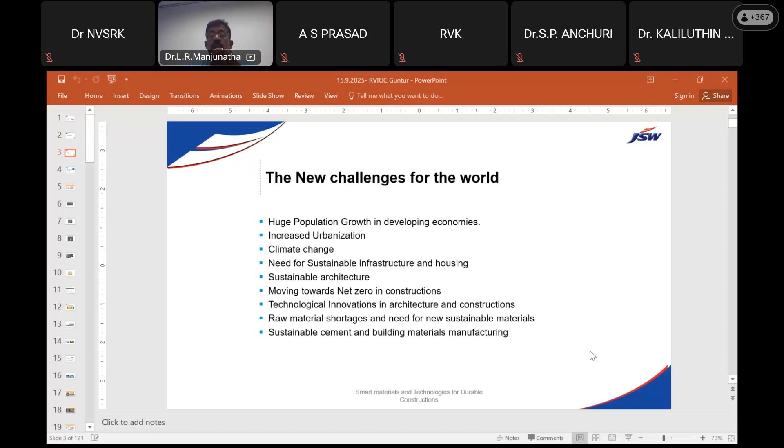Net zero means whatever carbon emissions are produced are offset equivalently, saving carbon dioxide in construction. Technological innovation in architecture and construction, raw material shortages, and the need for new sustainable materials, sustainable cement and building materials manufacturing - these are the new trends happening in the construction industry.

And we are part of that development. As I told you, my dear friends, the background for construction is cement. We are going to use cement, and concrete is the second most consumed material on this planet after water. We continuously consume concrete because it is the most economical material, abundantly available, and compared to other products like steel, aluminium or timber, it is more sustainable.

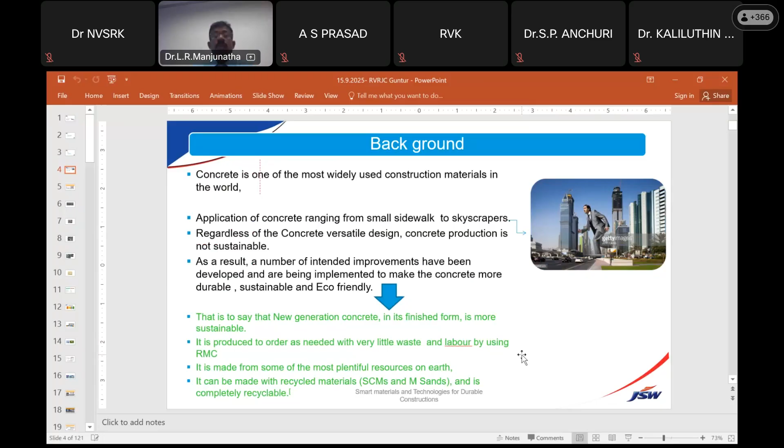But we need to look into the way we use cement for construction and developing skyscrapers, because every ton of cement produced emits carbon dioxide. This is because limestone, the material used for making cement, is calcium carbonate, which gets converted into calcium oxide.

As I told you, my dear friends, as the world moves towards huge urban population growth, 60% and above of the world population will be living in urban environments by 2050. The population growth by 2050 will be 9.2 billion people from the current 6.8 to 6.9 billion, so population is continuously increasing.

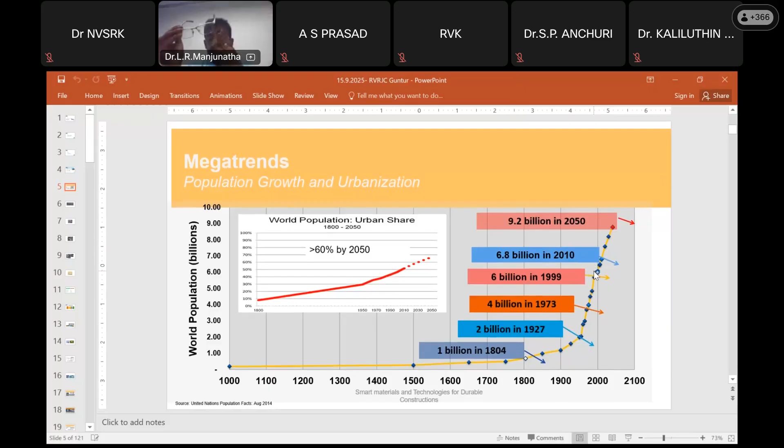That too in developing countries like India, China, Bangladesh, Malaysia, and Indonesia - these are huge population growth centers. So we need to develop relevant infrastructure.

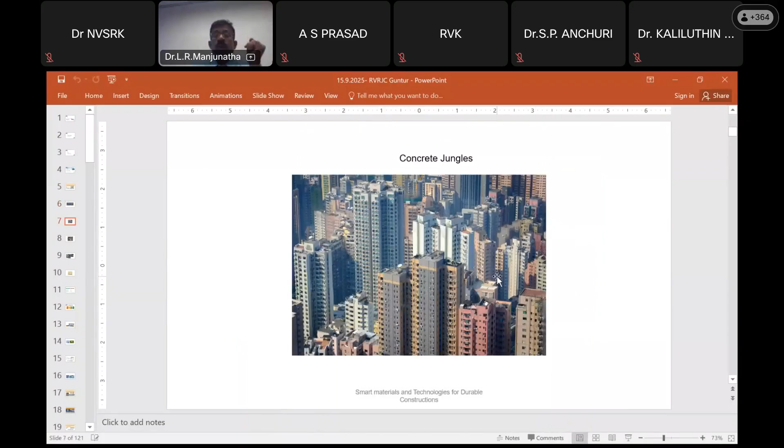This is going to be the future, because we need urban slum development - redevelopments are happening in the slums. In a city like Mumbai, redevelopment is going to happen, and this entire stretch will not be there in the next 5 years. You can see only tall buildings like this after 5 to 10 years.

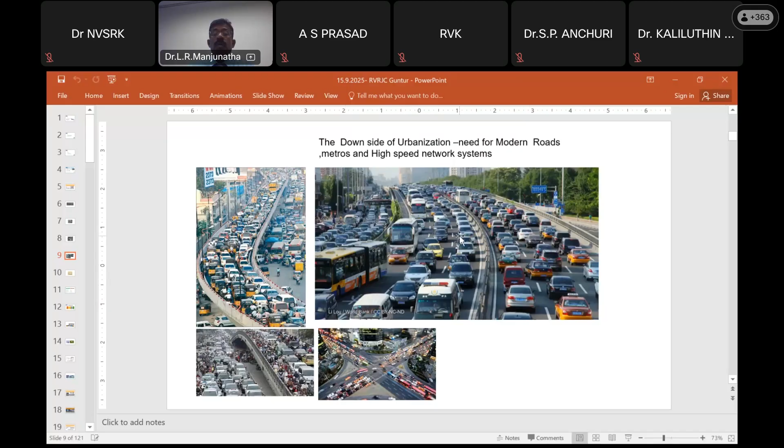On weekends, you can see all the highways full of people and vehicles, because owning a car is not a big thing nowadays - most middle class people own their own cars. So they come out with their own vehicles, clogging the road infrastructure. These are the adverse effects.

The adverse effects of urbanization include rapid development of cities, lack of sanitation, poverty, and unemployment. Cities not only attract educated people, they also attract the workforce providing facilities to middle class or highly skilled people - you get maids, carpenters, taxi drivers, all kinds of people migrating to urban centers in search of employment, livelihood, and better facilities.

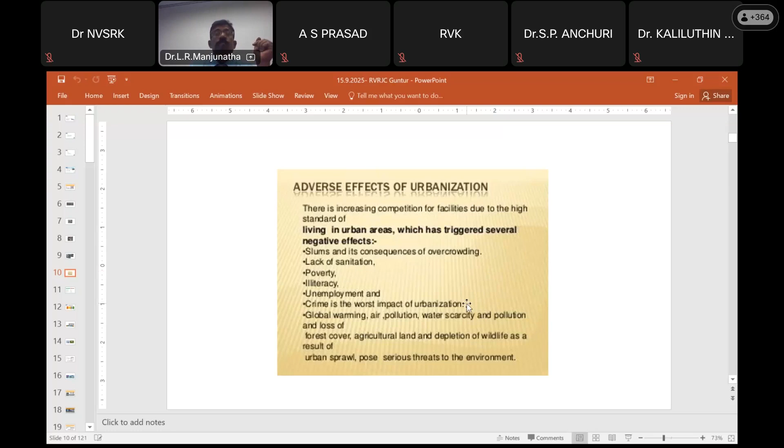This is leading to global warming and urban heat island effects. So, urbanization has pros and cons - people may get better public transport, but there is high level pollution, noise pollution, light pollution, and higher chances of homelessness because people start living in slums they cannot afford.

In a city like Mumbai, you want to have a small 1BHK, you have to spend not less than 30 to 40,000 rupees per month. If you're not earning so much, say only 25,000, you tend to live in shared apartments or maybe slums. So that's how the cities are getting shaped. Concrete jungles are there, and we need to really work to support the population.

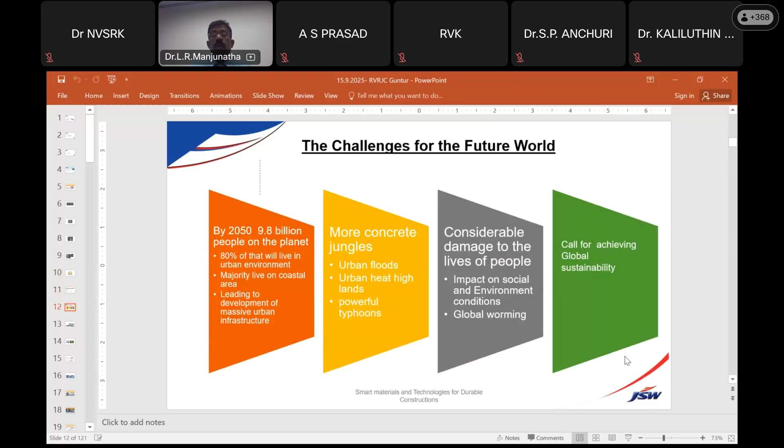So the future depends on how we can develop smart materials, smart energy, and smart construction. Smart construction comes with challenges.

We have to construct sustainably, because every year the world construction industry and related industries emit 50 billion tons of carbon dioxide. About 30% of these emissions come from the construction industry alone. We have buildings, iron, steel, cement, and other industries using materials which emit a lot of carbon dioxide.

I want to dwell more on the cement industry and how emissions come from it, because we use limestone to make cement along with clay or iron oxide. We mix these fine materials and heat them up to 1500 degrees centigrade. We heat it in pre-heaters, pre-calcination, where we remove carbon dioxide from the calcium carbonate, that is limestone, and take that raw meal, heating it up to 1500 degrees, sintering it in the rotary kiln using thermal sources like coal or alternative fuels.

At the end of the day, we emit close to 925 kg of carbon dioxide to make 1 ton of clinker. We need to really work on that, because as we consume more and more cement, India is already consuming 450 million tons of cement last year, and the installed capacity is close to 700 million tons. We are going towards 1,000 million tons installed capacity and consumption of 700 million tons of cement by 2030, because we are building more and more infrastructure projects.

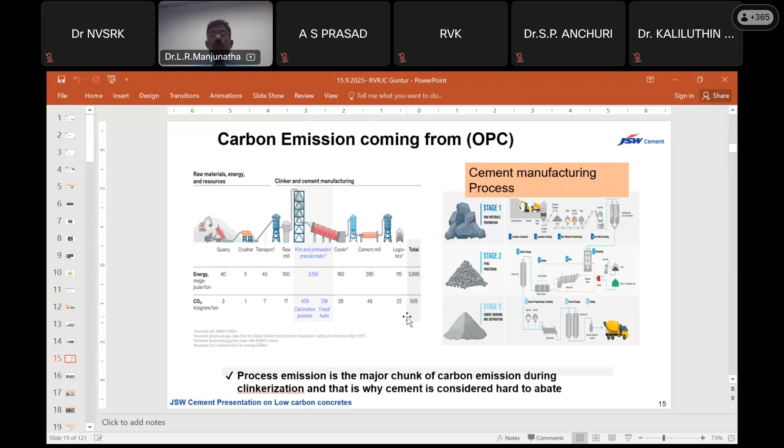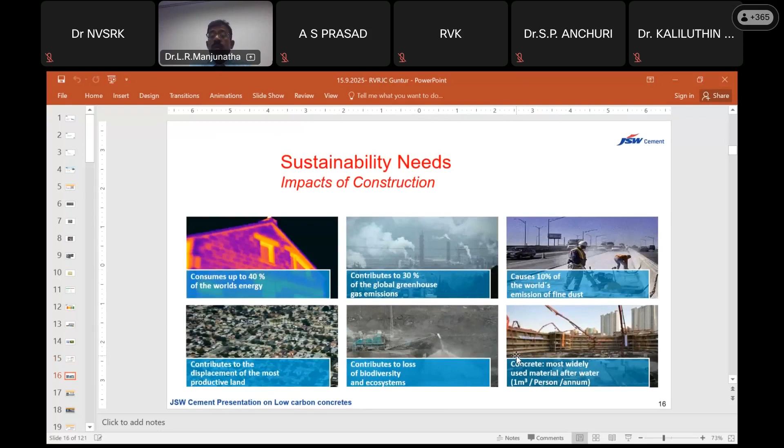So significantly, we need to work on the impacts on construction because of sustainability challenges: dust at 10%, greenhouse gas emissions at 30%, and energy consumption up to 40%. And we know we have to live with concrete, because it is the second most consumed material on this planet. So these are the challenges.

We encounter huge challenges, increased carbon dioxide emissions because of higher consumption as we go forward. Then landfill space and additional cement plants are going to come. The usage of water is also tremendous, along with increase in land use. These are the challenges we face continuously when we go towards sustainability goals.

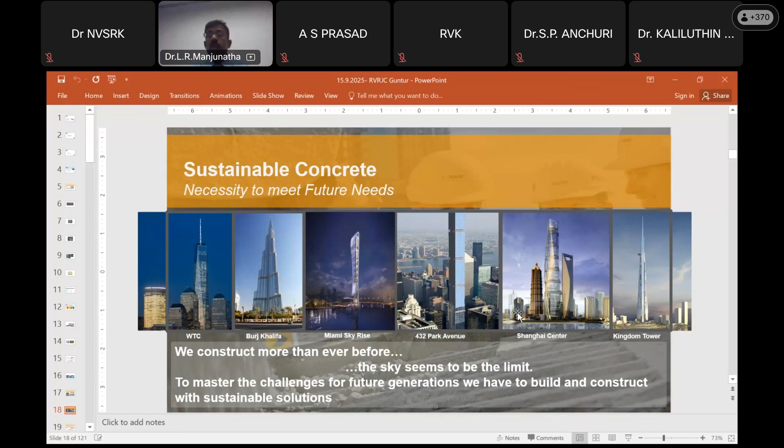As we know, challenges are more, but we cannot stop the construction. High-rise buildings are going to come. This is the skyline of many developed geographies - the Burj Khalifa, World Trade Center, Shanghai Center, Kingdom Tower, and so on. Similarly in cities like Bangalore, Hyderabad, or Mumbai, we are already seeing towers up to 50 floors, and Mumbai towers up to 100 floors.

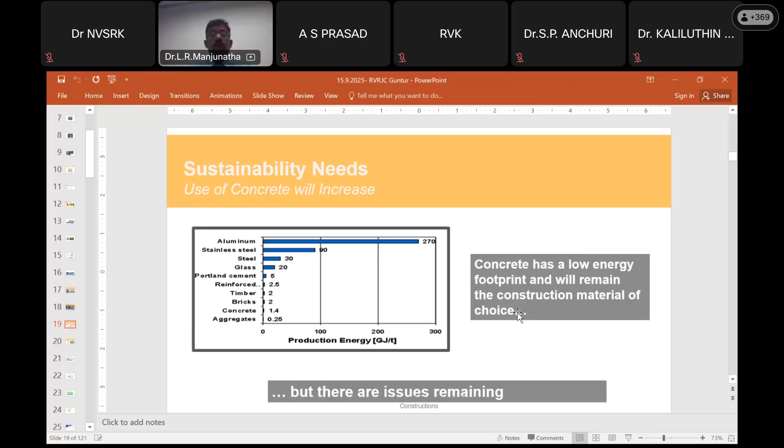We are seeing the skyline of Mumbai, and it's going to increase further because Indian geography requires more and more tall structures. Sustainability needs concrete, which is still the low energy footprint material compared to any other material like aluminum, stainless steel, or glass. Concrete comes at 1.4 in terms of energy, but the issue remaining is how we can make it more and more sustainable. We require a lot of resources.

When you use ready mix concrete, we can use alternative material like GGBS, fly ash, calcined clay, or lime powder. We can use construction and demolition waste. We can use high performance admixtures, and why not, we can even use Carbon Cure technologies. So ready mix concrete is the way forward, where we can use various technologies to achieve required strength and durability parameters.

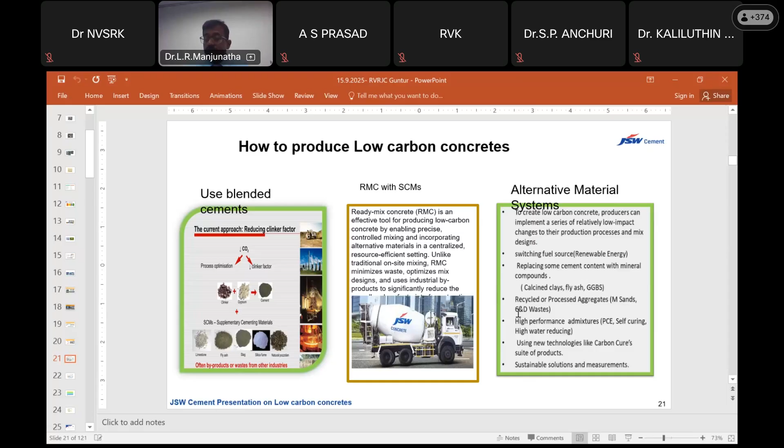So JSW, I am from JSW, and as a company, we produce a lot of slag from the steel mills, and we produce a lot of fly ash from thermal power generation. Both are supporting industries.

We have adopted circularity in our manufacturing process by using sustainable green materials like fly ash, GGBS, and other slags in the manufacturing process of cement and other CC products.

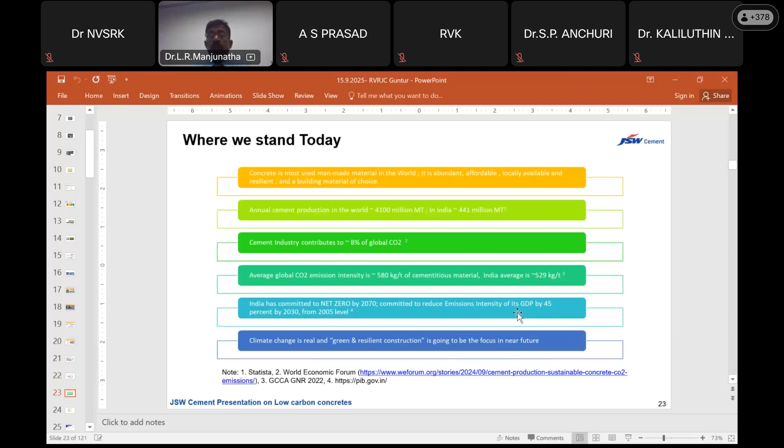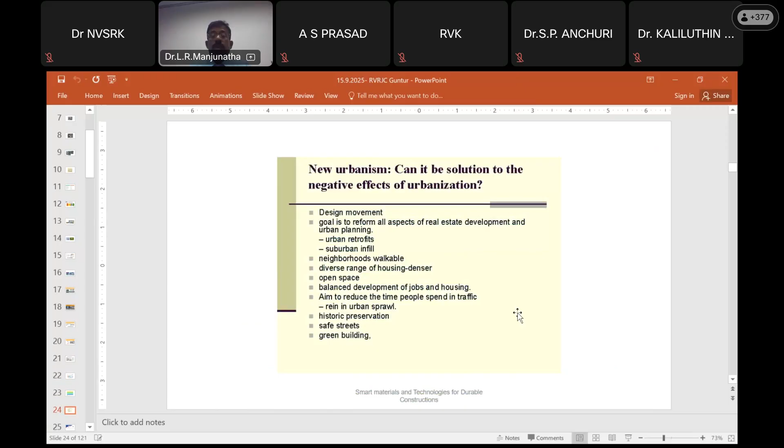So where do we stand today? We need to continuously evolve ourselves to augment the sustainability agenda, to reduce the carbon footprint in construction. This is possible only by adopting new materials, new designs, new methods, and also adopting sustainable urban solutions.

There's an urgent need for sustainable development all around, as I told you, my dear friends. I've already discussed the parameters of reducing the carbon footprint per 1 ton of emissions.

Going forward, we need to reduce greenhouse gases because the global temperature from pre-industrial levels has already gone up by 1.5 degrees as of last year. If we continuously touch 1.5 degrees centigrade over the next 5 years, we've already reached it. If the temperature goes up to 2 degrees centigrade above pre-industrial levels globally, we're going to have more catastrophic effects.

We're going to have hurricanes, we're going to have many typhoons, we're going to have many adverse environmental effects like cloudbursts and floods. These are all going to affect the environment.

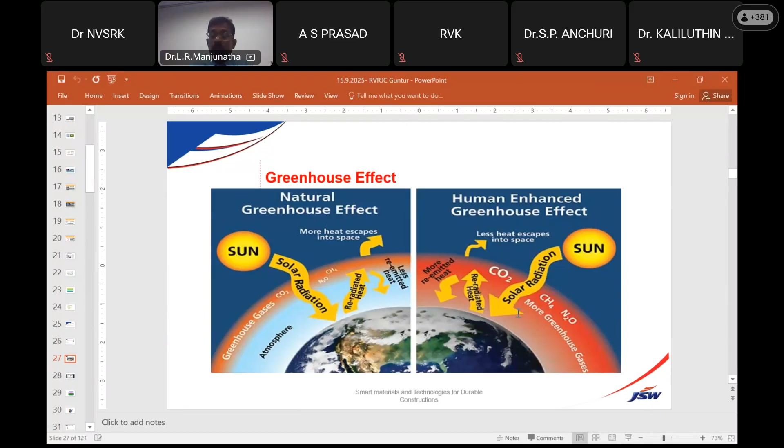Urban heat island effect is one more parameter affecting the global environment, so cities are getting more and more polluted. This is what we can see - the maximum pollution is happening in India, African countries, and China.

Other places are relatively okay compared to these countries because more consumption of cement and development is happening in these countries, where they consume cement but don't have much ready mix plant operations, so the concrete manufacturing process is still site mix concrete.

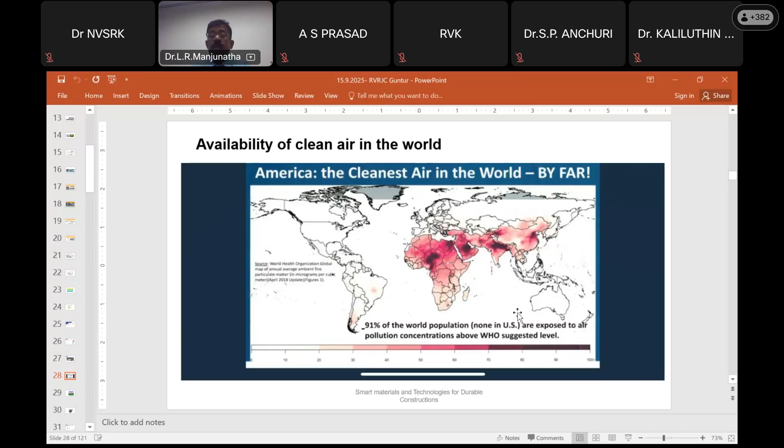I already talked about the urban heat effect - cities are getting warmer compared to the surrounding neighboring areas, so we have a temperature gradient of 2 to 3 degrees centigrade. I studied Bangalore's temperatures going up by 1.5 degrees centigrade compared to the last 20 years.

The growth because of concrete jungles - we're creating more and more jungle, and there's no passage of air flow through the centers.

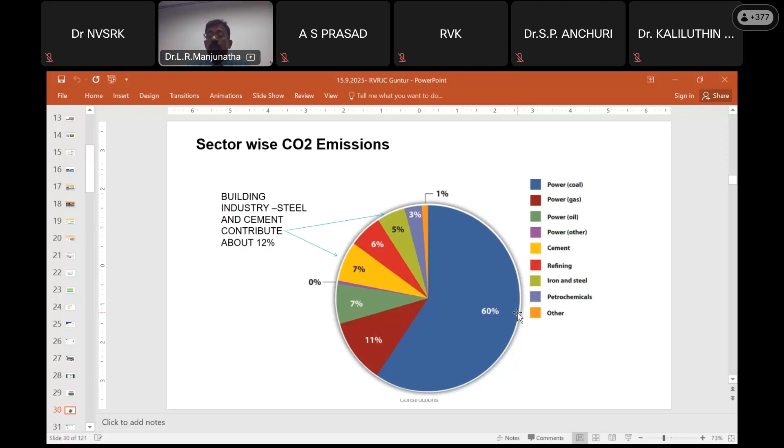As I told you, the percentage of emissions comes from the cement industry, steel industry, and thermal power generation. We'll continue to use thermal power generation even by 2070, when we're talking about net zero emissions from India. We'll still be using thermal power because to support the 1.4 billion, or possibly 1.8 to 1.9 billion population by 2070, we need alternative sources. Despite developing more green energy footprint, we'll still be depending on thermal power generation. We need steel, we need cement to build infrastructure.

In terms of emitting parameters, India stands third highest in the world after China and America. So the need of the hour for all civil engineers is to go for sustainable development.

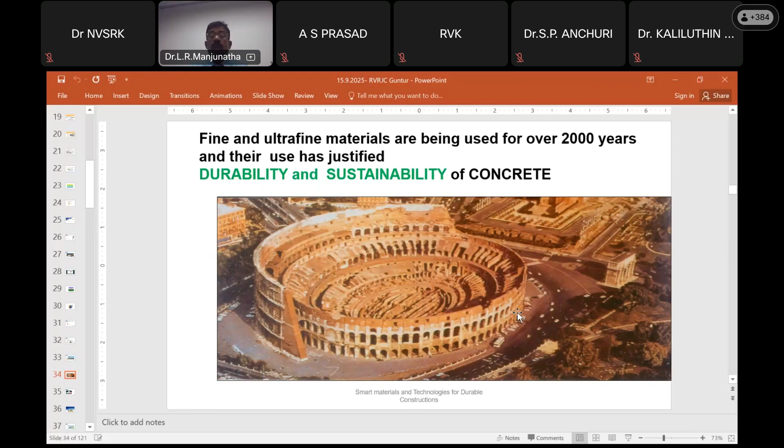Look at how the Romans developed concrete technology 2000 years ago. They built the Roman Colosseum, the Roman Pantheon - these structures are still durable and long lasting even after 2000 years. That means they did not use cement at all at that time; they used volcanic ash and other binders, lime and other binders. We know these materials aren't widely available - volcanic ash or lime are not available in plenty, but cement is available in plenty.

So our sustainability goal should be achieving economic benefit, protecting the environment, and social benefit for society. These three cycles - the triple bottom line - are very important for developing sustainable solutions.

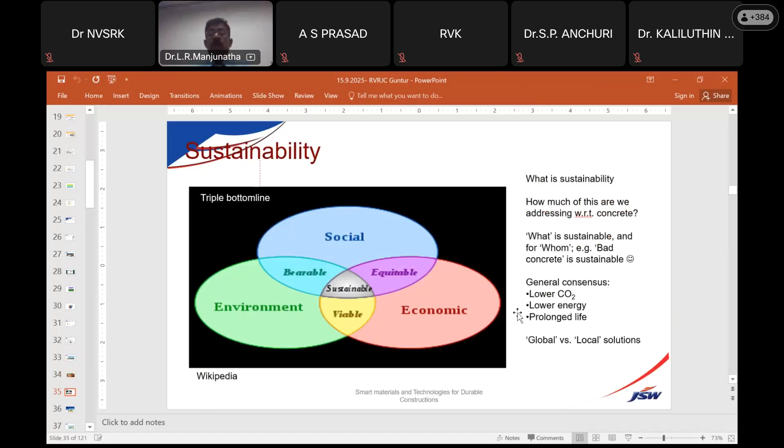That can happen only through green building construction. Green building construction means adopting green building materials, sustainable solutions, and green practices in developing a green ecosystem based on architectural benefit. The 10 best ways to achieve smart construction include going for precast concrete technology, advanced shear wall technology, 3D printing, using AAC blocks instead of masonry bricks, and using BIM, big data, and other innovative practices.

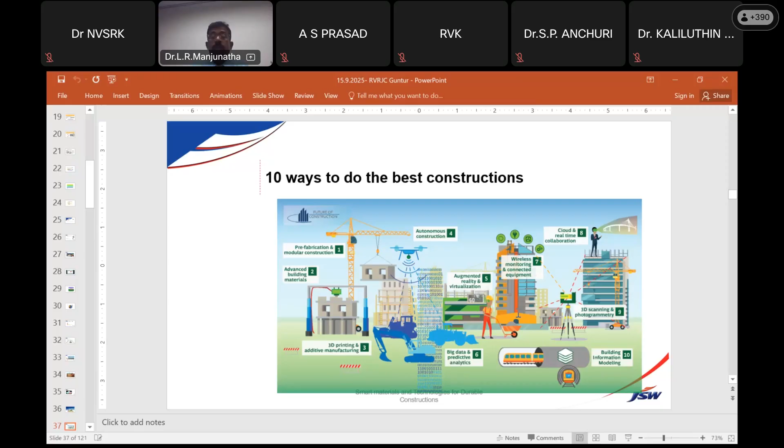This is the way we can achieve the best construction practices to develop sustainable buildings and green solutions. This requires huge resources - as I told you, you require more cement, more steel, more AAC blocks or sheets, whatever is needed. We need to use technology to reduce the carbon footprint not only in construction but also in building material sourcing.

So the value chain, the logistics chain, the supply chain is very important. As we go forward, there will be smart materials, smart building materials coming out.

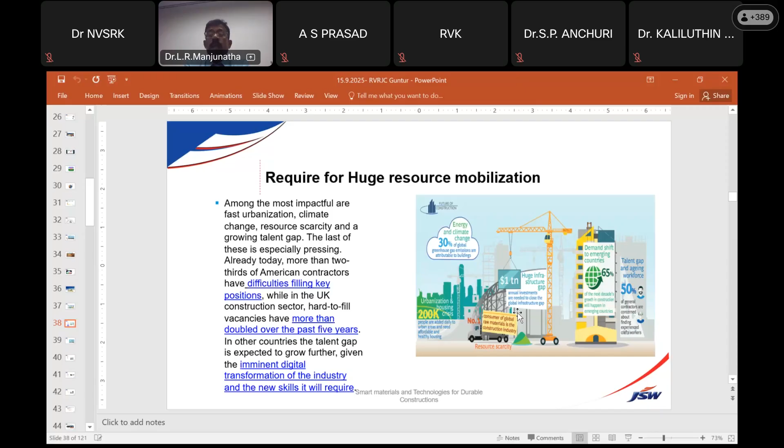I'm using 1 ton of cement. So you'll be asking what is the carbon footprint, called EPD value, environmental product declaration. That is gaining acceptance now. Countries like Europe or America, for any product they want to use in construction, they ask what is the EPD value. The lower EPD value products are preferred over higher EPD value products. That's called global warming potential.

So this is what actually the future of construction looks like by 2071. You'll be using artificial intelligence, cloud collaboration. There will be less and less workforce, and we'll be using more and more machine and drone technologies for inspection.

So that will take care of cloud collaboration, sensors, remote structural health monitoring, and robotics. The previous speaker was telling that structural health monitoring is very important, because when we are using so much material in concrete construction and designing buildings for 100, 150 years, continuous monitoring of structural health for mega structures like bridges, tunnels, or high-rise buildings is necessary. We need to monitor the strength and performance of the concrete regularly.

So the future of architecture and engineering involves sustainable cities, green landscapes, urban gardens, green materials, artificial intelligence, and future-ready cities. Cities will be automatic, like how we use our smartphones, intelligently interacting. Already we have systems like AI-based traffic management solutions, such as Bangalore is adopting, where based on traffic movement and congestion, they divert the vehicles.

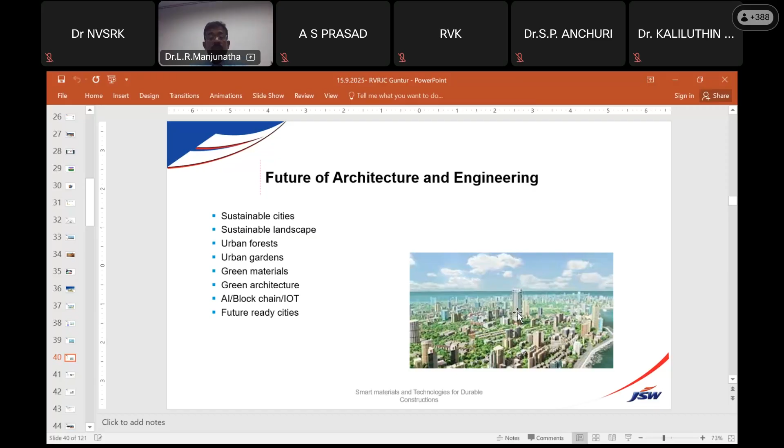So this technology is going to come, and more and more innovations are going to come. Our students and faculty members also have to adopt these things, because they need to train young engineers properly, so that they remain in civil engineering without going to other fields for employment. So the need for technological upgradation is very important.

As we build structures, the concrete jungle is now becoming a glass jungle. The glass jungle gets changed to the eco-friendly way of green buildings, where we can even grow plants and small trees on the buildings. This is one example I'm showing, where you can create an urban forest and an urban garden where you can grow fruits through hydroponic farming, or grow vegetables.

We cannot depend on this forever, because farmers may leave their farming and become workers and come to cities. That's how it is in America, where only 3% of the people are involved in agriculture. In India, we still have 40 to 50% of people involved in agriculture, but the trend is going to change. So we need to create urban jungles.

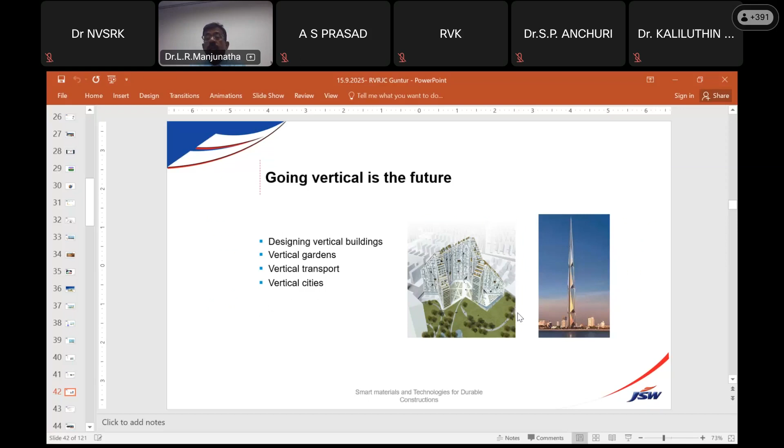So going vertical is the future. We need to keep building vertically because of the transportation systems, with metros and other things. More and more people start living near their workplace, and they need a place near the workplace. That means they are going vertical.

So we will be moving from conventional to performance-based design and specifications. How performance based? Now we are talking about M20, M25, M30 grade concrete, mix ratios like 1:2:4, 1:1.5:3, 1:1:2. That is not going to be the future - that is going to go back. We are going to design a grade of concrete based on the carbon footprint.

So I am designing M20, M25, M30, considering what is the replacement of cement by GGBS or fly ash - 30%, 40%, 50%. We are going to design based on what is the carbon footprint. That means if I'm designing with 50% GGBS, the emission norms are only 230 kg per 1 cubic meter. If I am using fly ash at 30%, my emissions are 250 kg. So I prefer a concrete which has a lesser carbon footprint based on the design specifications.

So the performance-based design goes for placement control, durability, ductility, and structural performance, because we are going for more and more high grades of concrete. Ductility is important, and structural performance of the concrete is important, because we're designing structures for more than 120 to 150 years of service life.

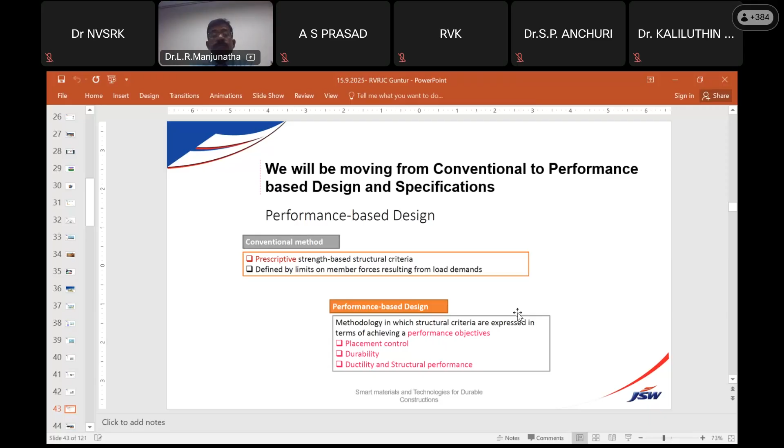So we need engineered materials. The admixtures are changing every day, the way concrete is being made, because admixture technology is able to address the performance of concrete in terms of reducing water cement ratio, high performance concretes, high flowability. You need to pump the concrete up to 1 kilometer. Let's say I'm going for high-rise buildings, I'm going to pump the concrete for a long distance. So admixtures are playing a very important role, and structural behavior is changing the way we are using admixtures.

We can use cement, we can use SCMs like fly ash, GGBS, or metakaolin, microsilica, other products. So finally, admixtures, the modified admixtures, PC-based admixtures, are very important. They have to give long-term workability, along with high strength. Supplementary cementitious materials are playing a very important role. We have limestone powder, fly ash, slag, natural pozzolana, clay, and other products from various manufacturing processes. Process industry byproducts are available too, like red mud and copper slag. Using these products, we need to work.

The world is moving towards that kind of development, creating, along with nanotechnology like graphene and nanotubes, nanomaterial we are using in developing high performance concrete.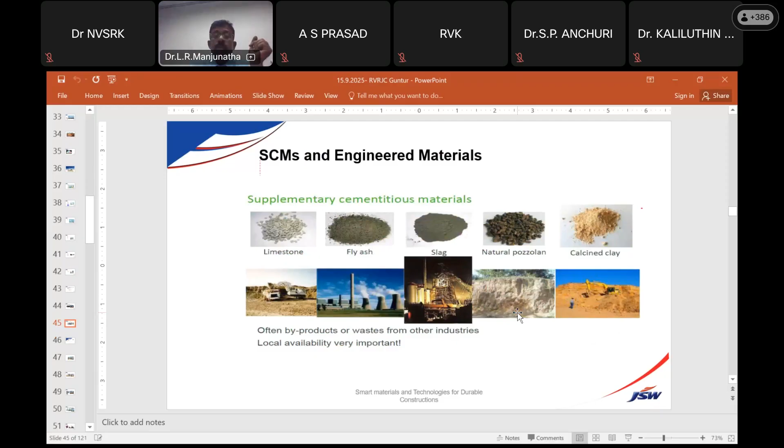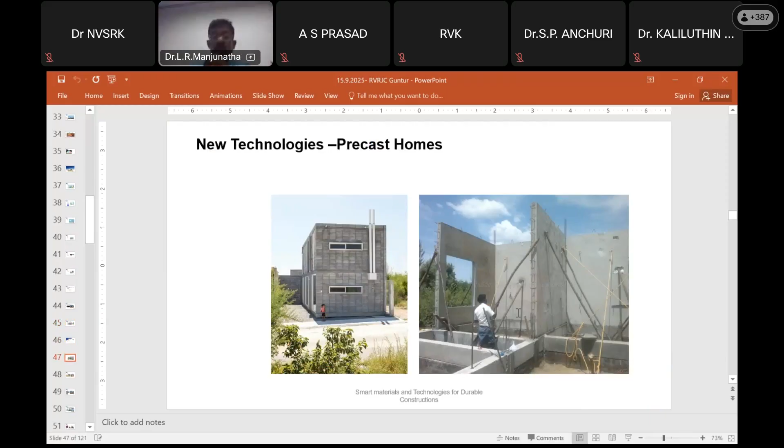New housing technology for construction means we are going away from brick and mortar technology. We are going for precast technology where you can reduce the size of the element and construct much faster. We are going for 3D printing. We are going for drywall technology where you can just put the drywalls and construct it very fast. It's a composite structure. As the previous speaker told, composite structures are becoming and gaining more acceptance.

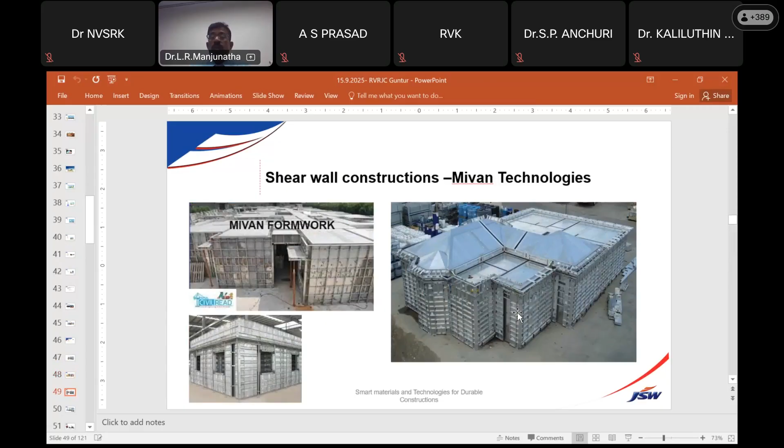Shear wall technology, like Mivan formwork, is making construction much faster, and it has been adopted by many cities now - Bangalore, Chennai, Hyderabad, Mumbai, and others. They are going with shear wall technology because it eliminates the huge demand for workforce, it's much faster and quicker. You can do it much faster, and also the quality can be assured.

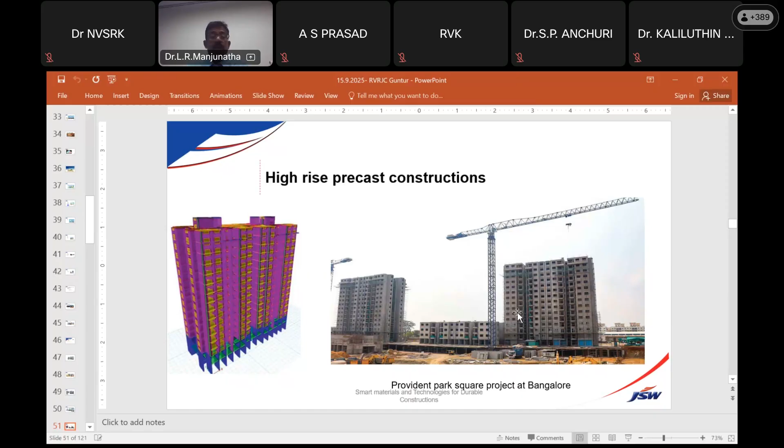This is precast technology, Puravankara. You can see by using precast technology, you can build these high-rise buildings, and the connections are very important. Now precast technology is advanced - the connections and joints are done properly. There's no problem at all.

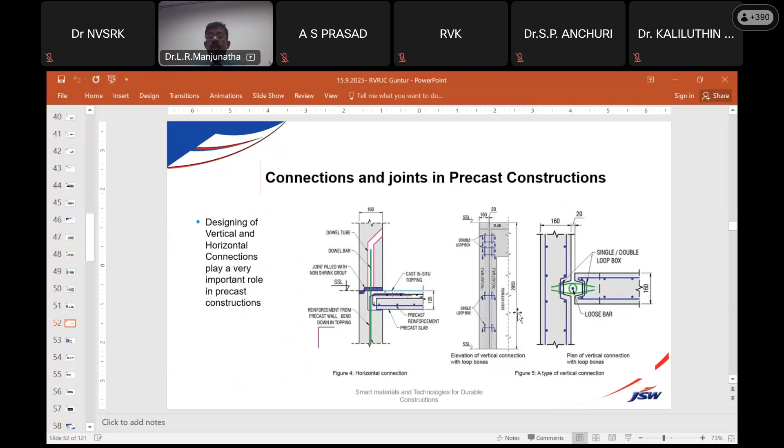Mass housing projects are gaining acceptance. People are developing mass housing. BMTPC has developed prospective systems for mass housing projects in 5 ways - buildings can be made somewhere and joined together. Smart technology - you can see the buildings are fabricated somewhere, moved on a truck mounted trailer and installed at the site. This is quite common.

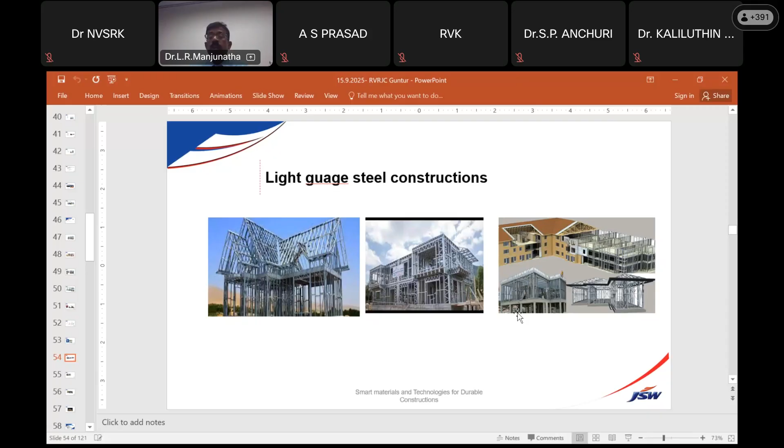Light gauge steel construction is a smart technology. These are technologies to build faster, so your time is avoided. Like now the floods are devastating in Punjab and other cities, so you need to build structures quickly. So BMTPC comes in handy so that you can construct in 3-4 months and hand over to the people who are homeless, because these technologies help to construct housing much faster.

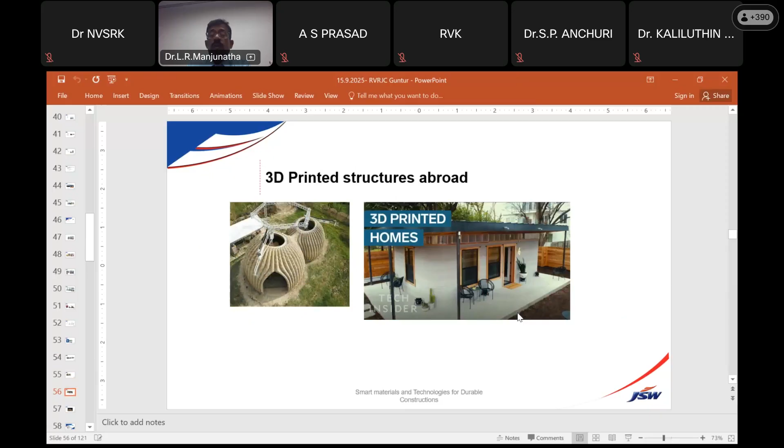3D printing is one technology which is gaining acceptance and growing much faster now. With 3D printing you can print to any shape, and you can print faster. In 1 month you can have the entire building - the building can be printed in hardly 1 week's time. So you can finish in 1 month what otherwise takes almost 8 to 9 months.

You can use alternative materials - this is done with mud, raw earth. Printing need not use cement, you can use various metals, various eco-friendly materials, smart materials. Using nanotechnology, you can design an ink so you can have any color, any shape, any design material, so it looks beautiful. These are the technologies.

Coming to concrete materials, I won't spend much time - I've already discussed that concrete is very important and workability is very important, because every day in and day out we use concrete and materials, and need to be much faster here.

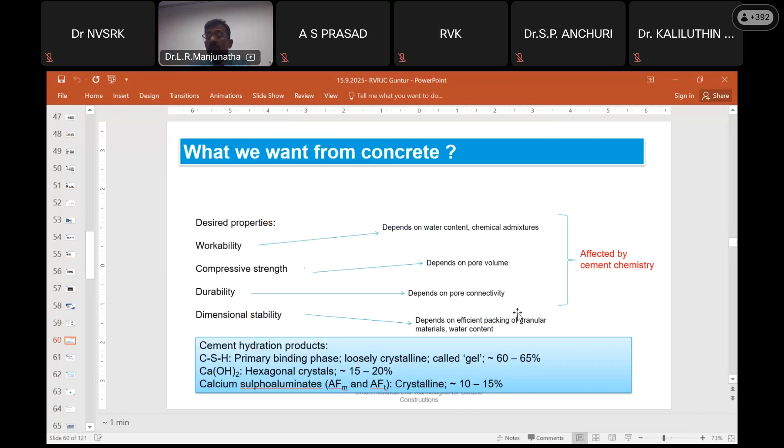So, sir, how much time do I have still? Up to 12 o'clock, sir. 45 minutes - ah, it's okay then, no problem. Thank you sir, thank you so much.

So concrete durability is also very important. Durable constructions are very important, so we need to design structures. I would like to have a glass of water.

So concrete durability is very important because we are building structures. Most of the structures now, India is having more than 7,000 kilometer length of coastal line. If you take even Andaman Nicobar Lakshadweep Islands, it is more than 12,000 kilometers of coastline. So most of our structures and infrastructure projects are coming along the coastline, because coastline is gateway to the other world. We can move goods and material.

Lot of ports are coming. Lot of manufacturing facilities are coming, like China. China's model is that they have built their entire infrastructure manufacturing along the coastline, so that they can put all the materials onto the ship and transport to any part of the world.

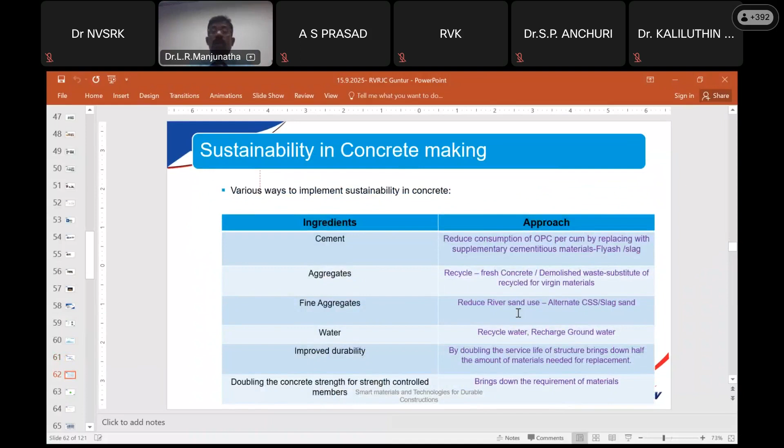So durable concrete comes through a very good design approach. We need to use supplementary cementitious materials in place of cement. We need to use high quality aggregates, and recycled water for making sustainable construction, to improve the durability of the structures. So sustainable concrete, how we can call any concrete sustainable, is by optimizing the material usage.

So let us say I am using 400 kg cement. Instead of 400, can I make the concrete with 350 kg to get similar M40 grade concrete strength? What kind of smart materials do I have to use? What innovation do I have to use?

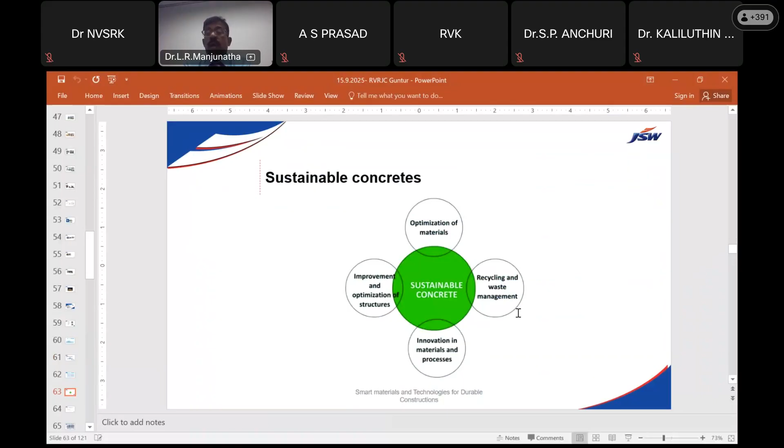So innovation, smart material, is nothing but - we know cement, we know GGBS, or fly ash. There are other materials we have to activate, like alkali activation for geopolymer concrete, nanotechnology, graphene material, or using recycled aggregates. So we need to use the available material, which is in limited source, to actually participate in the concrete manufacturing process to get durable and high performance concretes.

So new generation green materials in construction come through using mineral admixtures, chemical admixtures, alternatives to river sand materials, alternatives to coarse aggregate, nanomaterials, geopolymer, and conventional and non-conventional materials like bamboo, which is also gaining acceptance now - bamboo materials, aluminium, plastic, and polymers.

So Indian code IS 456 also permits the usage of high performance mineral admixtures like fly ash or GGBS in concrete making. Fly ash you can start from 15 to 30% we can use. GGBS we can go up to 70%, because GGBS has both cementitious properties as well as pozzolanic properties. So these are the mineral admixtures.

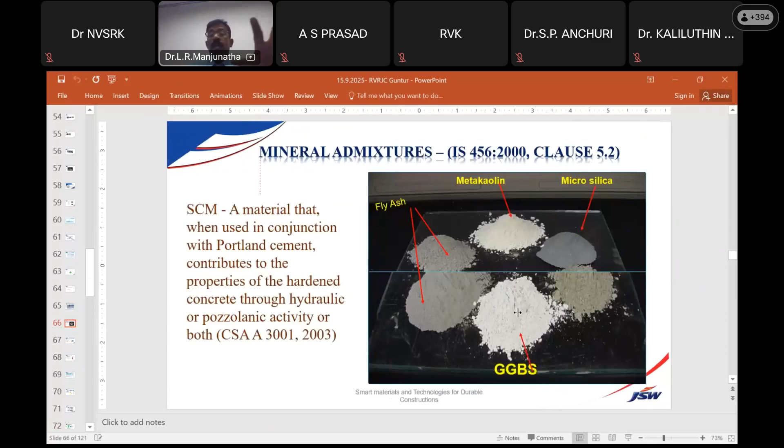Already I had shown you the chemical admixtures. Mineral admixtures are microsilica, fly ash, metakaolin, and GGBS. These are very good products. As I told you, we need to have a product which can replace 25 to 70% just like OPC cement, is easily available, and also reduces the carbon footprint. So this is one product, GGBS.

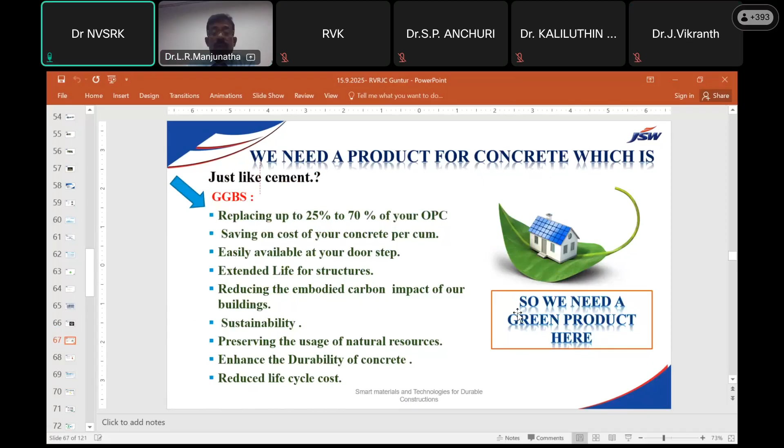So how does GGBS come? GGBS comes from steel plants, having a blast furnace as a process of making steel. So we get high quality steel, and also about 30% byproduct is slag. So when we heat limestone, iron ore, along with fluxes like bauxite, up to 1500 degrees centigrade, we get molten slag along with molten iron. The molten iron we take for various steel manufacturing processes, and molten slag is used for making GGBS or slag cement.

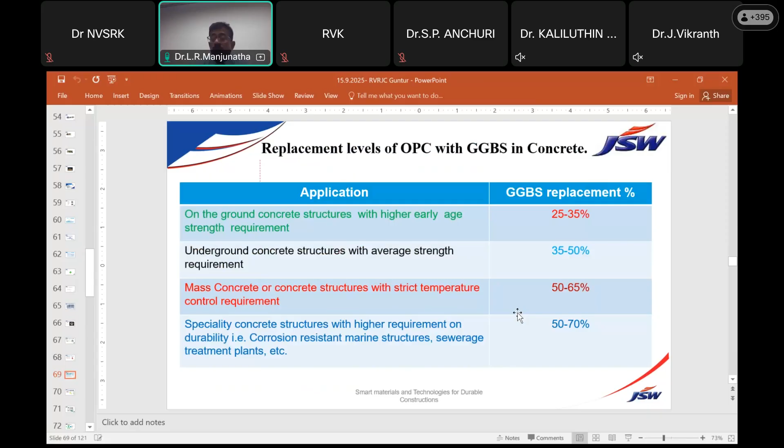The replacement levels, based on the application, start from 25% up to 70%. So based on early requirement of strength, we can go up to 35% like precast elements or post-tensioning concrete applications, and we can go up to 70% for marine structures, sewage treatment plants, and corrosion-resistant structures.

So the advantage of using slag is that it has already suffered emissions during steel manufacturing. We only have the grinding emissions, which is about 60 kg per ton of GGBS, whereas Portland OPC cement comes with 850 kg emissions. So by replacing that, we can really bring down the emissions in concrete, either in the manufacturing of cement or in the manufacturing of concrete at the RMC batching plant.

That is after the concrete is set. So what GGBS or slag will do is react with calcium hydroxide and convert it into CSH gel again.

The interfacial transition zone is nothing but the space between the cement paste and aggregates. It is always weak. By adding this fine material, GGBS, which is finer than cement, we are filling the voids, and also a secondary reaction takes place, bonding the particles together. So the bond strength will increase—between the aggregates and the cement paste, and between the reinforcement and the concrete matrix will improve. This way we can improve the performance of the concrete.

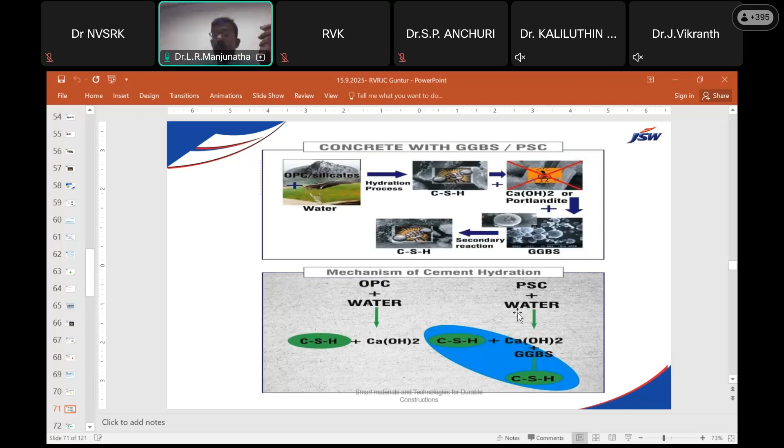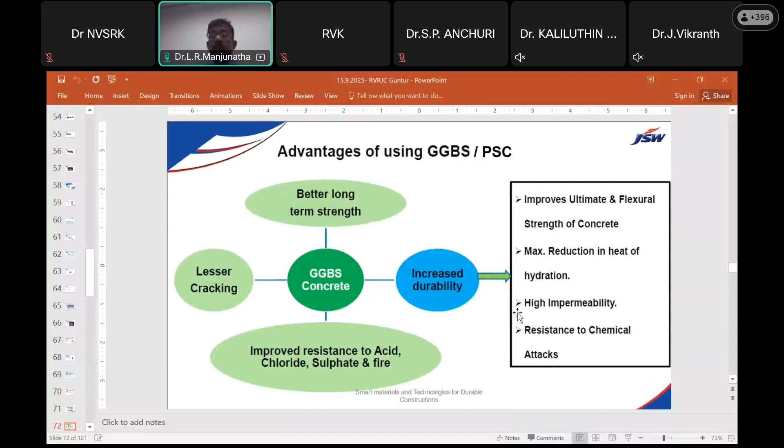So the strength properties, better long-term strength—56 days, 90 days strengths are almost more. It can go up to almost double the strength in 180 days. Durability is important, lesser cracking. These are the added benefits of using slag in concrete, and also the reduction in carbon footprint.

I've done a small calculation with 40% replacement of GGBS with cement, just calculated for South India. South India produces an average of 30 million cubic meters of concrete annually—that was the estimation done. So if you're using 40% GGBS slag in concrete, it's equivalent to 4 million trees—4 million metric tons of carbon dioxide saved. I'm just giving an example of one product, how this is affecting things.

4 million trees—imagine, can you imagine 4 million trees in a forest? How dense the forest will be? What is the area of the forest? It's massive—there may be Bandipur or Nagarahole or some other forest area. So I've done a calculation.

Let us say somebody is doing 10,000 cubic meters. If you are using 40% slag GGBS, you can save 1,050 trees. For 25,000 cubic meters we can save 2,626 trees, equivalent to planting that number of trees. If you're doing 2 lakh cubic meters of concrete for a big project, it's equivalent to 21,000 trees. So these are the calculations I have done practically for each and every case.

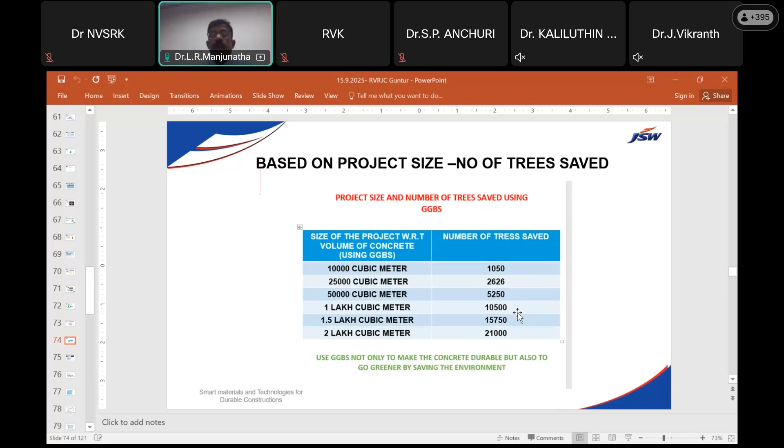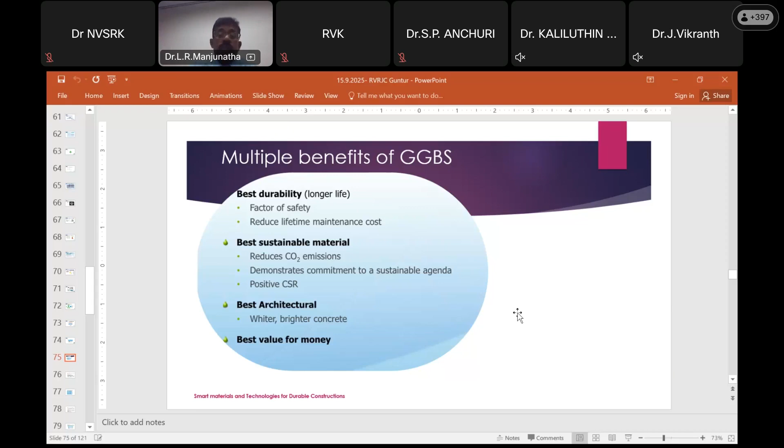So the multiple benefits of using slag or GGBS as a smart material: the factor of safety and design life gets enhanced, the serviceability and service life of the structure increases, and it reduces the carbon footprint. It's an architectural wonder—we can get brighter finished concrete. If you're doing white topping concrete or any finishing, we can have exposed concrete where you don't have to do painting also, because of its whitish nature, and it continuously gains strength and durability.

So blended cements are there—we know slag cement, we know PPC, we know composite cement. Now LC3 cement has already started being manufactured in India in a big way. These are the blended cements. India is producing close to 73% of total cement production as blended cement.

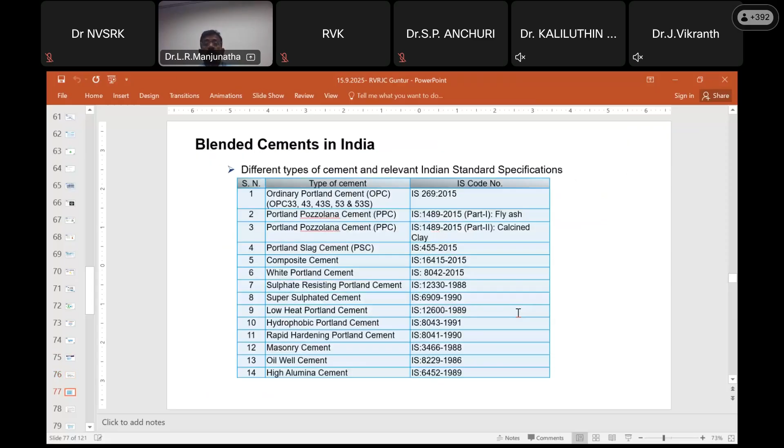So using blended cements is very important. If you are doing any site mix concrete, don't go with an OPC 43, 53 grade cement. Go with a blended cement like PPC, slag cement, or composite cement. It's very good and gives highly durable concrete—these are the various codes I'm sharing with you for various types of cements: Portland slag cement, composite cement, LC3 cement. Many cements are available in the market, and you can make use of those cements.

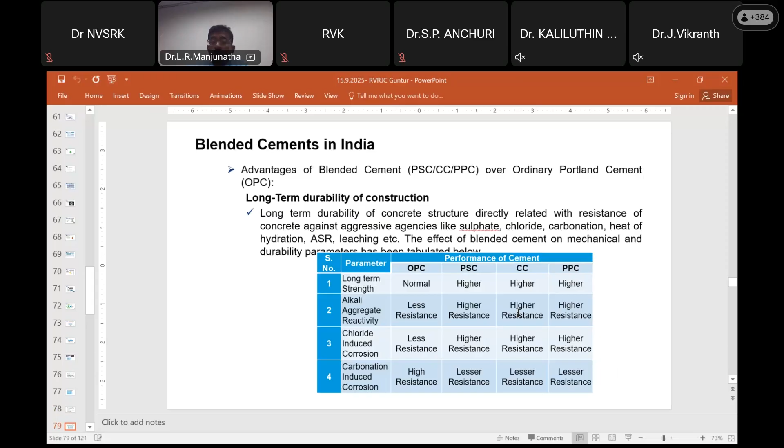Blended cements in India are clearly evolving, and more adaptation of these blended cements should happen in concrete making. In terms of performance, long-term strength, I've given the example of OPC, PSC, composite cement, and PPC, with 4 parameters: long-term strength, alkali aggregate reaction, chloride-induced corrosion, and carbonation-induced corrosion. In all the parameters, the blended cements—PSC, CC, PPC—perform much better than OPC cement. That's the reason we should use it.

And it gives us alignment with the circular economy. So using blended cement, blended concretes with SCMs will give a circular economy, which is very good for a country like India, where we are expanding our footprint in terms of housing and infrastructure development, roads. The Indian government is now planning 50,000 kilometers of highways and expressways.

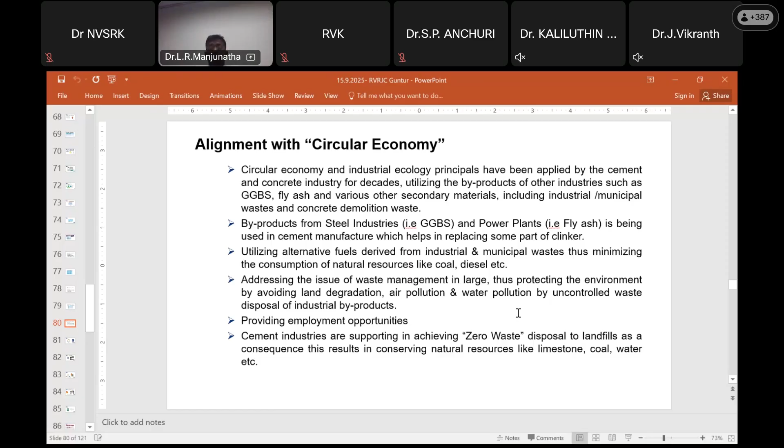They are designing more than 100 airports, new airports, 100 seaports, and expanding continuously the urban infrastructures like metros. So all this requires a huge quantity of cement, a huge quantity of secondary cementitious material, blended cements, steel, because we need to construct them more economically, more sustainably.

So this is one more. This composite cement is very good in terms of durability. JSW is manufacturing this composite cement like JSW Comp Cem, which is available in the market. You can make use of these products. In terms of performance, it's very good compared to OPC cement, even PPC cement. This is ticking all the parameters like initial strength, final strength, quick setting, chemical resistance, increased durability, superior cohesion, greener product, heat of hydration is less, lesser cracking, and reduced bleeding.

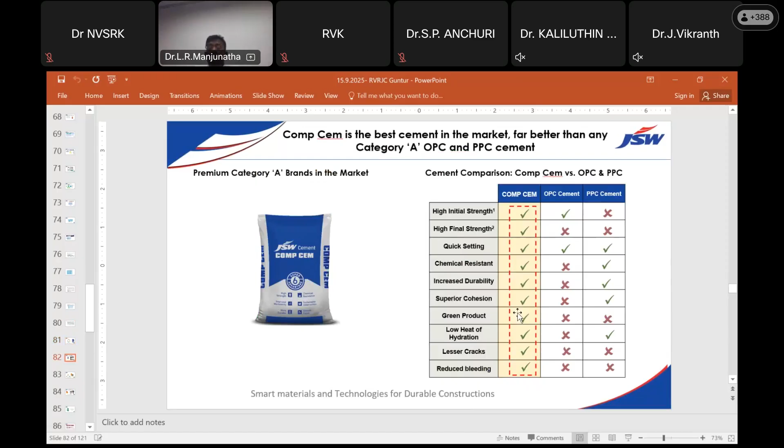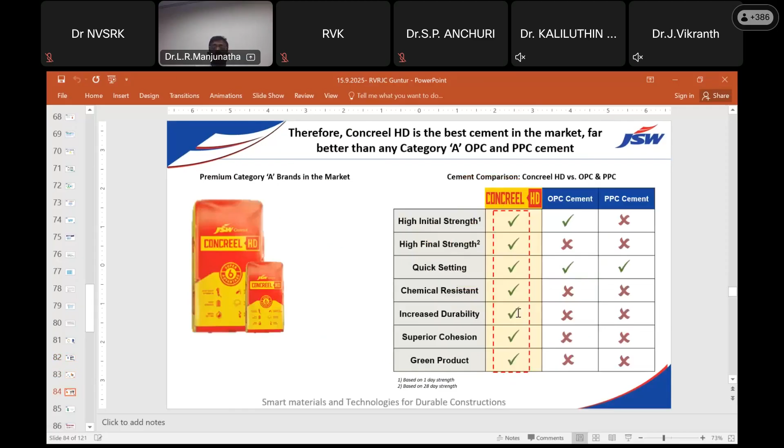Similarly, this is one more, slag cement, which is also very good in terms of performance compared to OPC cement and other cements. Slag cement is available from JSW.

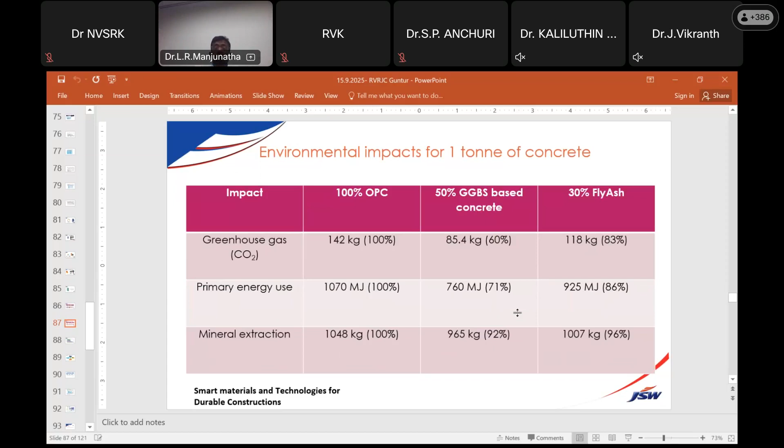Coming to the next point, use of blended cement, GGBS in concrete matrix, environmental benefits. So here going to a circular economy. GGBS manufactured from waste product or byproduct of steel industry really helps use this industrial byproduct or industrial waste, some people will always call it, to get the circular economy.

Resource conservation: we are preserving the natural resources like limestone. If we are using cement at the current rate, the limestone reserves will get exhausted in 30 to 40 years. So we need to preserve the limestone for the next future generations, because you cannot continuously break mountains and degrade the natural environment.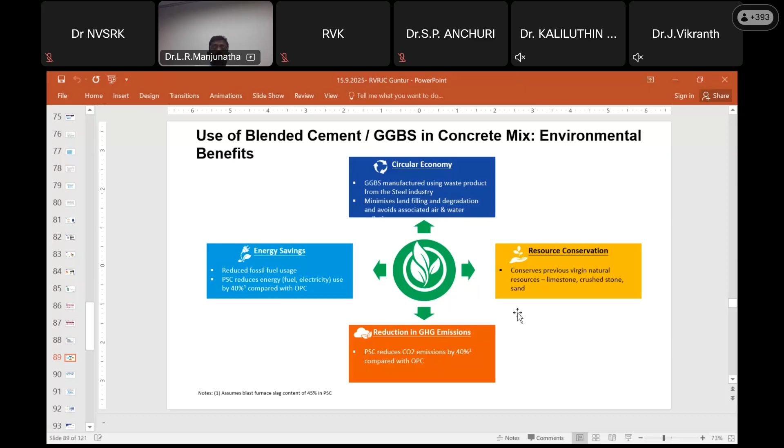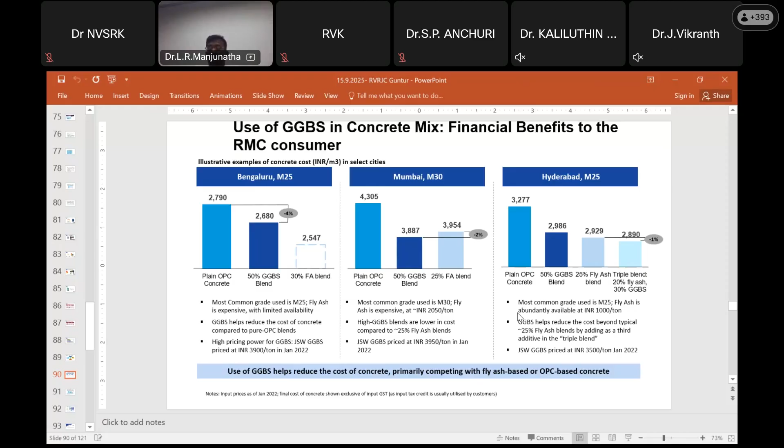So usage of GGBS in concrete mix, I have told you how we can reduce costs. We have examples from Bangalore, Mumbai or Hyderabad of concrete cost. So we can gradually reduce the cost of concrete also. Generally people look at whether it should be economical. So for more common grades, we are using a blend of 50% GGBS. In most of the matrix, it is always economical. We have also done comparative results on this.

In terms of reducing emissions, one company, JSW Cement, has done really very well. The global average of cement production is 608 kg CO2 for every ton of cement manufacturing, whereas in India it is around 560 kg, the Indian average. JSW stands at 242 kg. Because of that, we have been nominated as the world's least carbon footprint company. That is the advantage of our group company.

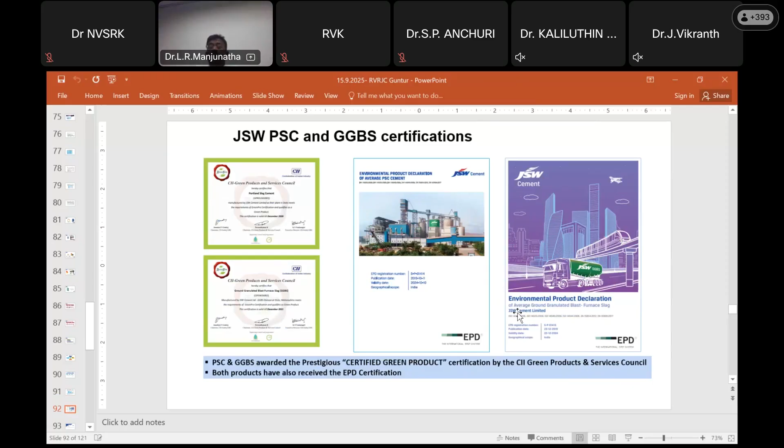JSW PSC and GGBS certifications, the EPD certifications, are available for these products. We have the CII Green Products and Service Council certification. We have the Environment Product Declaration for most of our products, where for every ton usage you can calculate the CO2 emissions from iconic projects. So using these products, so many projects have been benefited, and they have got many awards also.

Going forward, I'm going to talk about best practical examples, because faculty members should also know that what I am talking about is not from any textbook. Whatever I am talking about is only because of practical applications, my 30 years of experience in the field, where so many projects have been done using smart materials.

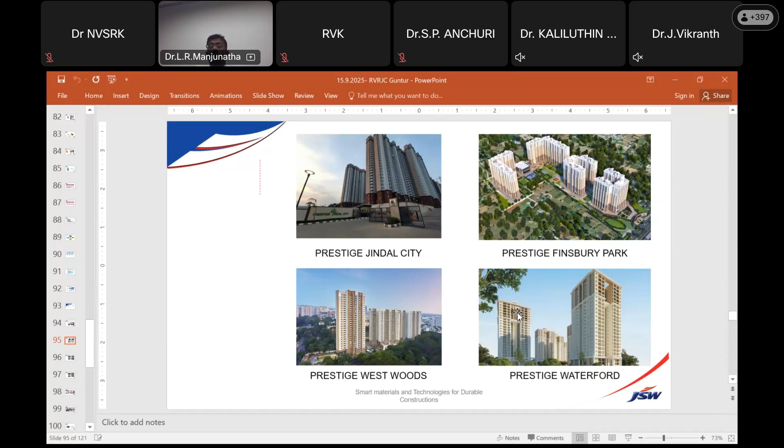Brigade, Puravankara, Prestige, Sobha Developers - some examples I'm showing you. Some highway projects: Bangalore-Mysore Expressway, Bangalore-Chennai Expressway, then Nice Road. This is a mass housing project for the Karnataka state government. So it's not only builders or developers using these, it's all government agencies. This is a housing slum development corporation.

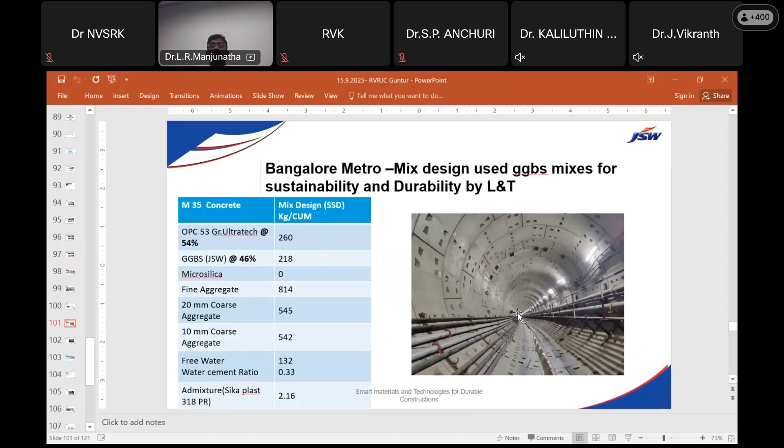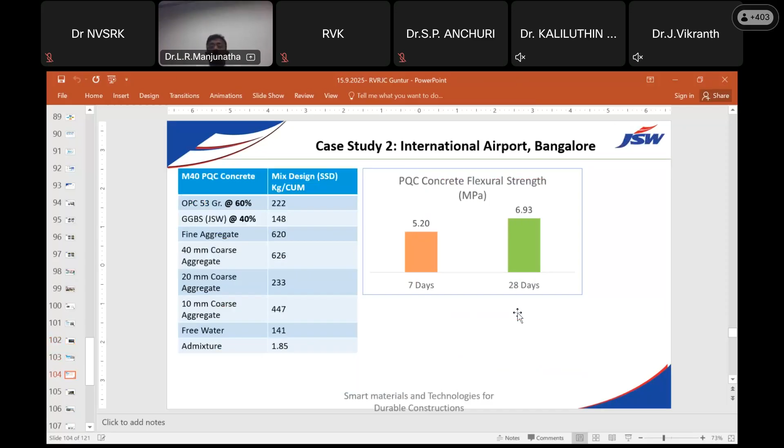When they are building structures for the lower income group also, these products come in handy, reducing the carbon footprint. So projects like Bangalore Metro Corporation, Chennai Metro Corporation, they have been continuously using these smart materials, the GGBS or the microsilica. Bangalore International Airport Terminal 2, which has got global recognition and global awards for sustainability and sustainable development - by using green sustainable material like GGBS, they have saved close to 1.2 lakh tons of carbon dioxide, equivalent to planting 1.2 lakh trees. This is the taxiways and other infrastructure projects at Bangalore International Airport, where they've used almost 40% slag as an alternative material. Bangalore-Mysore Expressway, Bangalore-Chennai Expressway.

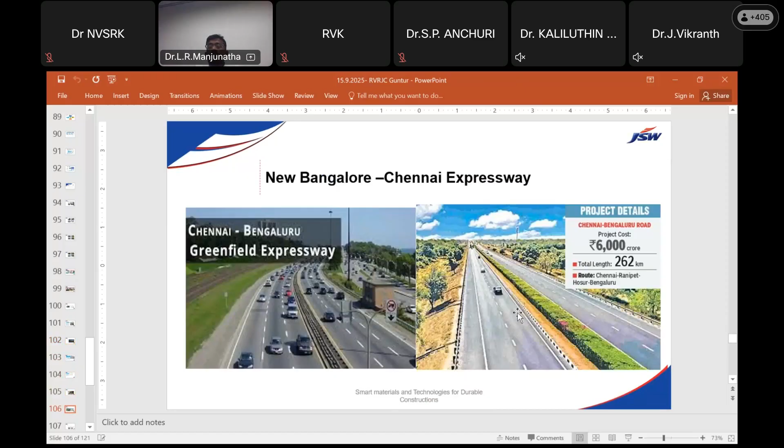At least 30% of the students who are studying should become their own entrepreneurs - 4 to 5 people together. Now the government is supporting, giving funds. Karnataka government gives up to 50 lakh rupees for a good startup, free of interest, with a design competition called Elevate. Similarly, many other states have also launched funding for startups. Apart from that, you get venture capital - there are so many foundations supporting startups. So let us not create engineers only to get employment, let us create engineers to develop an entrepreneurship spirit, new products, new innovations.

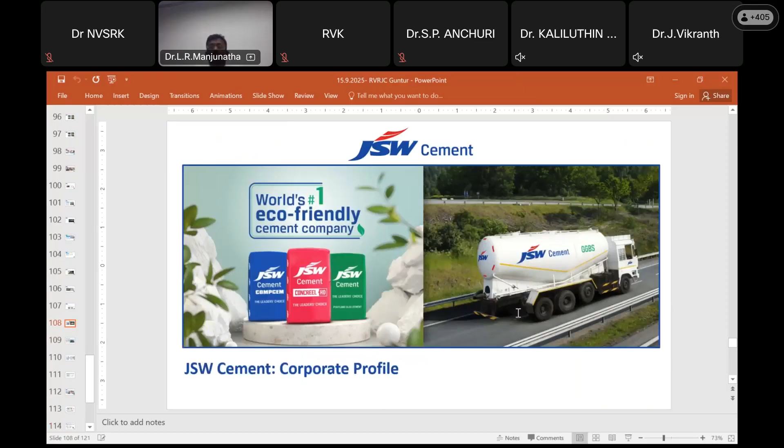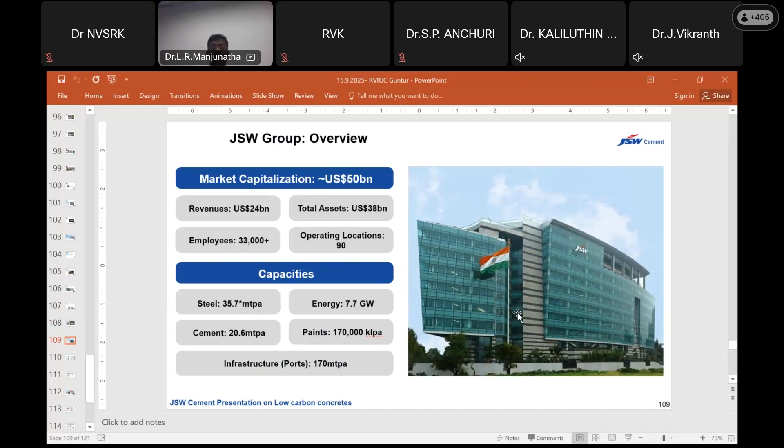Coming to the JSW group, I would like to talk about my group. It's a very big group of $24 billion. We are into building materials, steel manufacturing, cement manufacturing, energy manufacturing, paints and other things. We are growing fast - we have started our EV, JSW MG Motors. We have the footprint, we are launching EV vehicles also. We are spread across India, currently mainly operating in South India, Western India and Eastern India, and very soon our plant is going to come in Nagaur, Rajasthan, with which we will cover the central and northern parts of India.

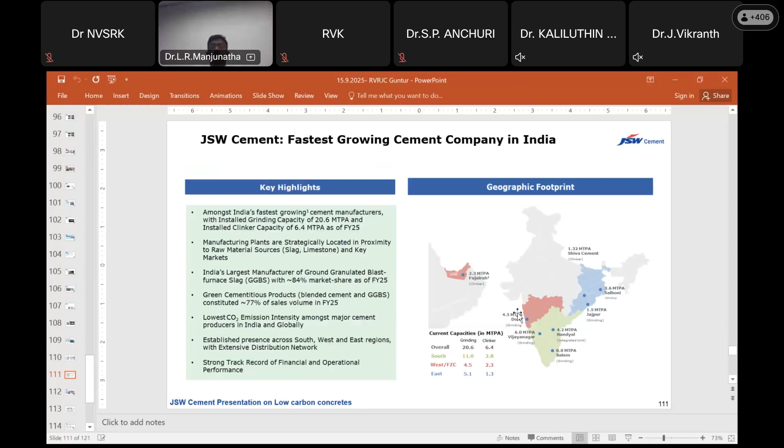Currently we are at 20.6 million metric ton capacity. Recently, through IPO, we entered the share market - we launched it successfully, and it was subscribed 7.7 times. These are the green products JSW cement is manufacturing. Not only cements, we are manufacturing ready-mix concrete, ready plasters, eco-friendly waterproofing products, floor hardeners, and tile adhesives. So there is a range of products JSW is manufacturing and giving to the industry, and all products have IS certifications.

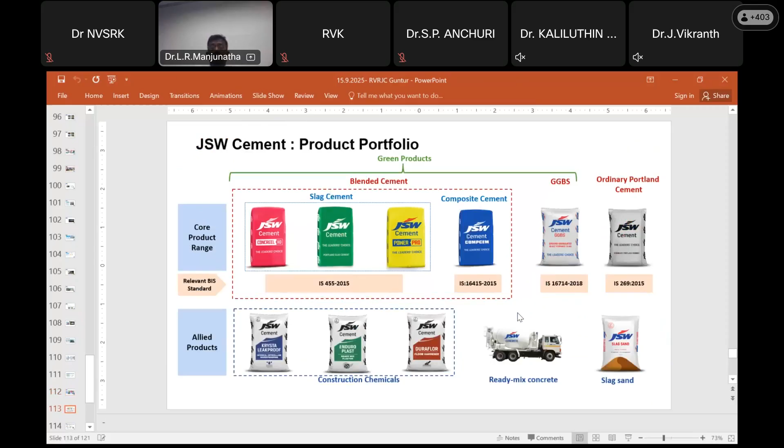So when you look at smart materials, green materials, we are there to support all of you. This has been endorsed by many government agencies like CIDCO, MMRDA, Kempegowda International Airport, many big companies like Tata Consulting Engineers, Tata Projects, Shapoorji Pallonji, and many top ready-mix plants like Ultratech, Prism Johnson, Nuvoco, ACC - they have been continuously using these products. Many residential and commercial buildings are also using them - Sobha, Raheja, Hiranandani, JMC projects. Everybody is using these products.

So moving towards net zero is not so easy - it is a continuous, evolving process. It's not only about embodied carbon - we have only 13% embodied carbon and the balance, 26%, is operational carbon. So we need to use smart materials not only in concrete but also smart fixtures - 5-star rated energy efficient fixtures in the buildings, not only in the plumbing system but also in the lighting system. So moving towards net zero means efficient lighting, double insulation, where it maintains the temperature - during winter it gets heated, during summer it gets cooled. This is called double insulation.

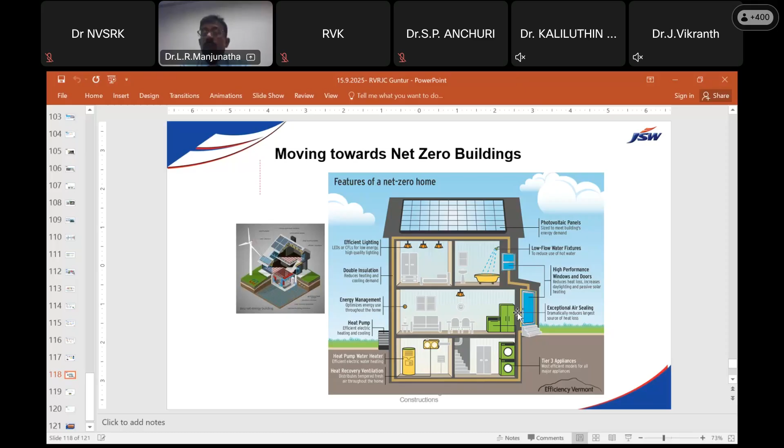Fixing up windows as per the sun movement direction for light and other things is very important. Air sealing is important, dramatically reducing the largest source of heat loss. So heat loss and heat gain, we have to work on that. These are the various systems we adopt for green building solutions.

Cementing a new concrete future is very important using smart materials, smart technologies. I've dealt with this for the last two hours, continuously talking about green materials, green sustainability, precast technology, 3D printing. These are all very important.

The participation of academia, colleges, and industry is important, where faculty members get involved with the students, not just to finish the chapter as per the syllabus and consider the job over. That is not the way. You need to create future engineers, because today is Engineers Day celebration. So how we build smart technology, smart materials, smart innovations, and bring them into regular practice is very important. We live our dream, very important.

We need to train and put all our efforts, because after mother, the next are the gurus. Guru Brahma, Guru Vishnu, Guru Deva Maheshwara. So like that, the gurus are important, and gurus should take a very active role in developing students.

Nowadays students are always with mobile, always arrogant. When I go to colleges, teachers are complaining. In many colleges, they say this new generation students are not good, sir, they're not caring, they don't listen to the classes. Sir, we have a challenge, the Gen Z student, they call them.

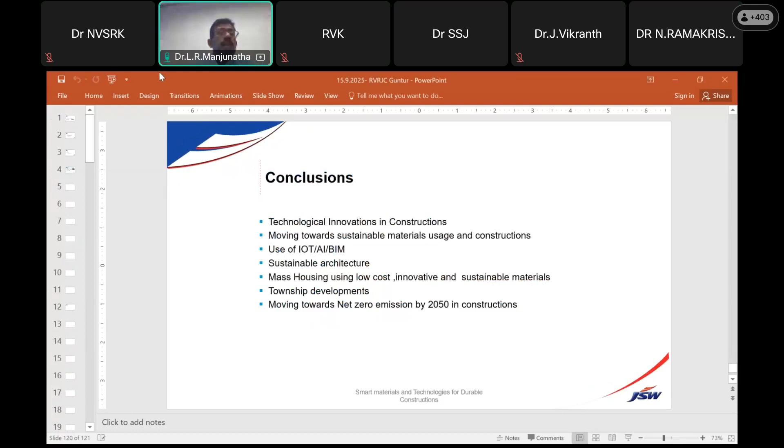Good morning, sir. The title slide has it there, your number and email ID. First slide, correct? Yes sir. That is my number, very true. Yes sir, good morning sir. Manjunath, sir, hello, just a minute.

Manjunath sir, yes, we are also taking the help of the mechanical department. We are working in the field of green building, using ANSYS software which gives detailed understanding of heat flow in the building, heat gain and heat loss, so that we can go for GRIHA, LEED, ASHRAE certifications.

Good sir, we will definitely interact. I'll also connect you with a company working on various competitions, like the Solar Decathlon. They conduct a program every year, so you can also participate in that.

Sure sir, I'll ping you on WhatsApp. I'll be very happy that in future we will definitely get connected. Good sir, very nice, sir, very nice interaction. So, good morning sir.

Yes sir, am I audible? Yes sir. This is Dr. Priyamnath Bhomik, sir, from Madanapalli, Andhra Pradesh. Madanapalli, oh okay, Andhra Pradesh, very nice sir, Madanapalli is my favorite, you are famous for mangoes. Although I am not from Madanapalli, I am working here. I'm actually from Assam, and that is why when I saw the spelling of Guwahati, I told you it's wrongly spelled. Anyway sir, it was a nice session.